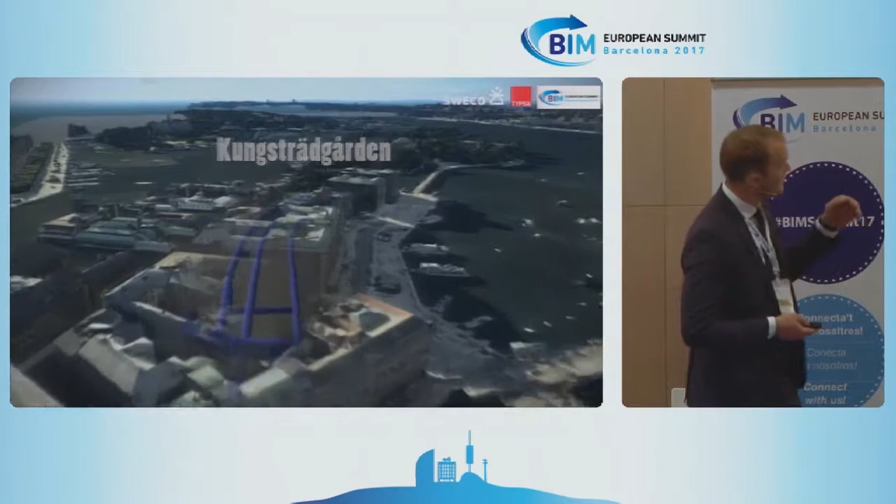Flying over the castle of Stockholm, we will turn around, go to the part we are working with. This is the existing blue line today that has an end station here. The entire tunnel runs through rock, and there's a deep crack under the Baltic Sea, where the construction will take place.

Moving forward, we'll see the Sofia station, which is more than 100 meters underground. It is one of the deepest stations in the world. Moving forward, we'll have a branch here. One goes to Söderort and one goes to the Nacka municipality.

Starting with the Nacka municipality, we will have, you can see the Hammarby Canal, which has entrances on both sides of the canal. Moving forward, we will see the Sickla station, which is really very important due to shopping malls and connection points for public transport. Moving forward, we'll see Järla and the end station here, Nacka, which is extremely important on the south side of Stockholm.

This is the other branch. You can see we were flying over Gullmarsplan, which is a new station under the existing one, Slakthuset, and the connection point to Sockenplan, to the existing one. Here we can see a top perspective, and you can see the size of this project.

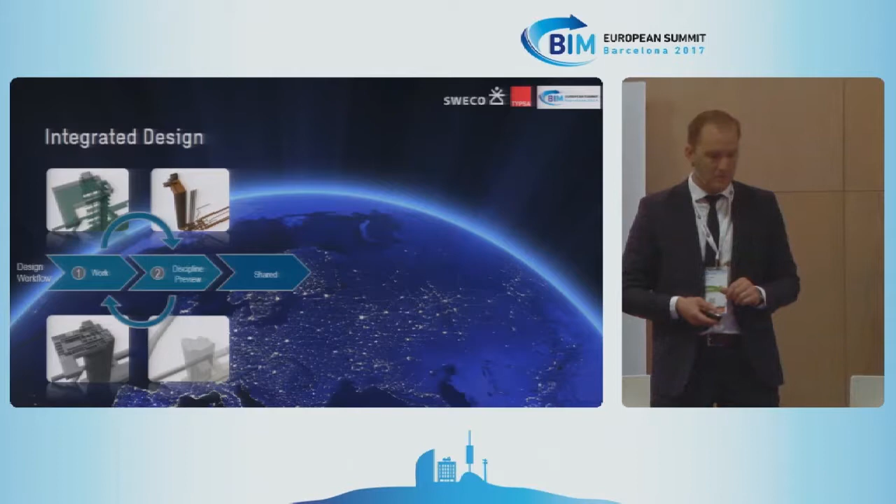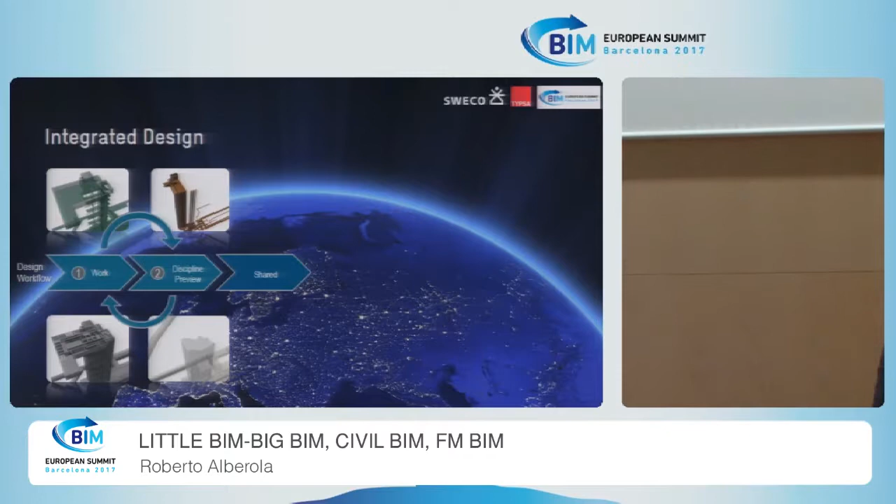Integrated design means every team working coordinated in the same way. The information exchange is managed inside a CDE, and design updates are available to all teams daily. The design advances by a continuous loop between work and preview states, and when reaching predefined milestones, it's pushed further within the workflow.

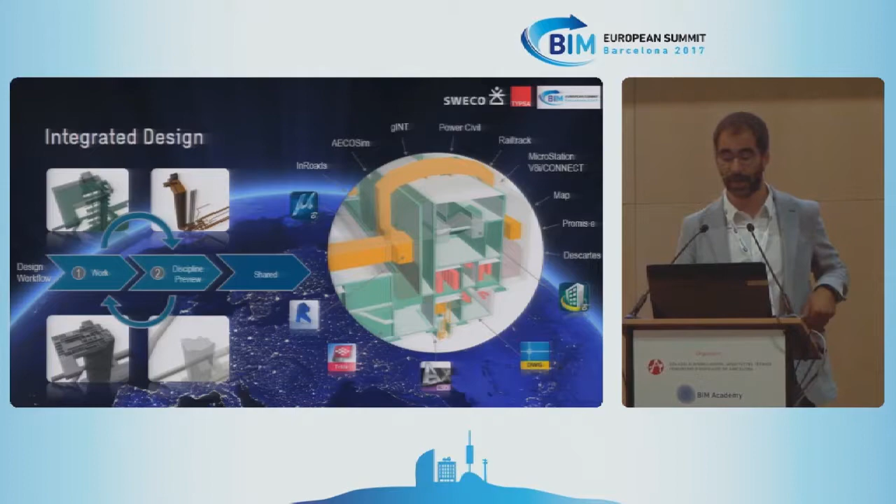We have involved many design tools, and the key point is how they work inside ProjectWise. Some are fully integrated as Bentley tools, but Revit and Civil 3D also have good integration in ProjectWise. We have achieved that. And for some, like Tekla, we have set up routines that upload the outcomes automatically.

The coordination process continues from the daily loop of work in progress states, and weekly the files pass through design and quality checks before going into shared state. Then every discipline model is gathered to be combined in a coordination model that serves as the basis for design review in meetings and coordination review.

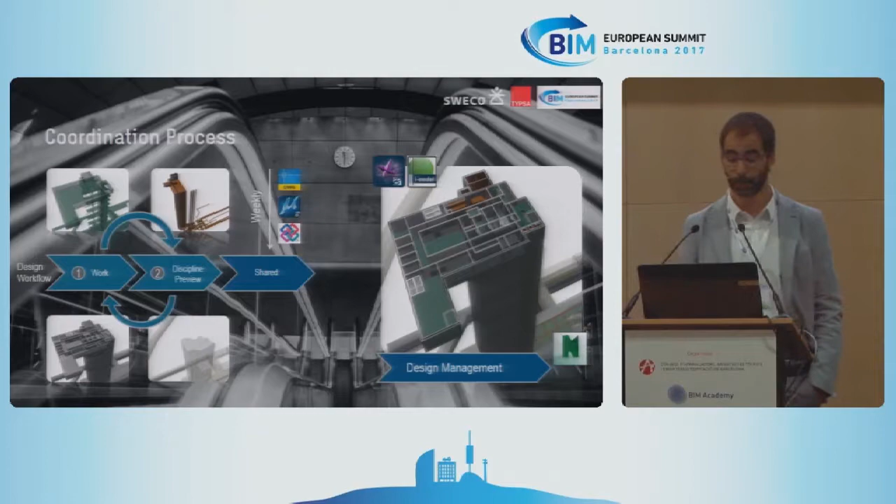We are sharing these models in meetings involving relevant teams from all our offices. The way the design is communicated to all teams is through the use of these coordination models. These federated models, which combine others, are updated on a weekly basis.

We are sharing them in several ways. Four of them you can see here, to be able to meet different needs inside ProjectWise or with a tool called Navigator in the web interface that ProjectWise provides. Mobile devices are also used daily to consult the updated design.

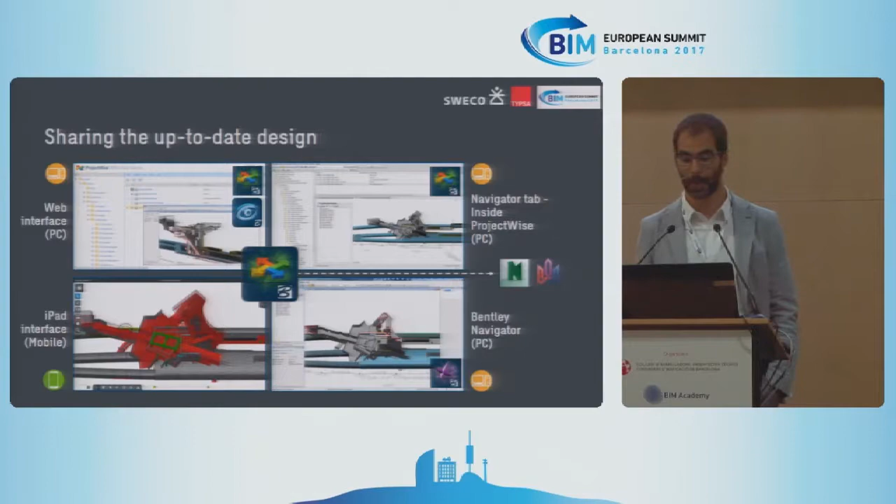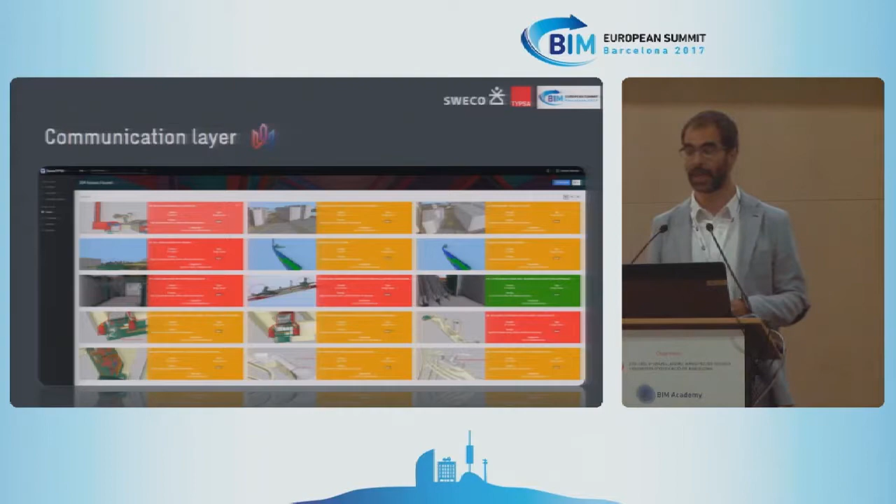BIM coordination takes place inside a cloud-based communication platform that manages the whole process. Clash checks are made by coordination teams to search for collisions between specific parts of the design. The conflict can then be classified and assigned to relevant teams, and all issues can be tracked so the design evolves free of major clashes.

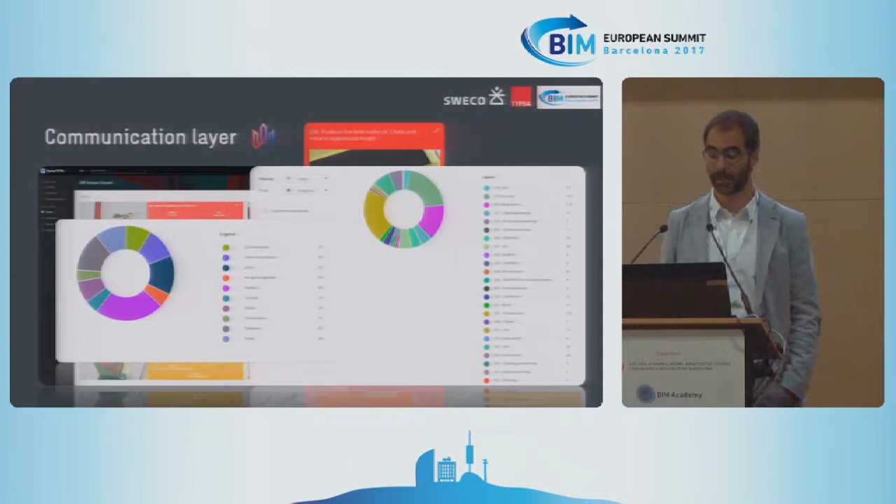Metrics allow us to measure the performance.

A little bit more about reality modeling, which was mentioned earlier. This is what we have already done and achieved, I think about 2 years ago. This is an example of how we have captured and created a reality model in a city environment, and this is one of the entrance areas of Sofia Station.

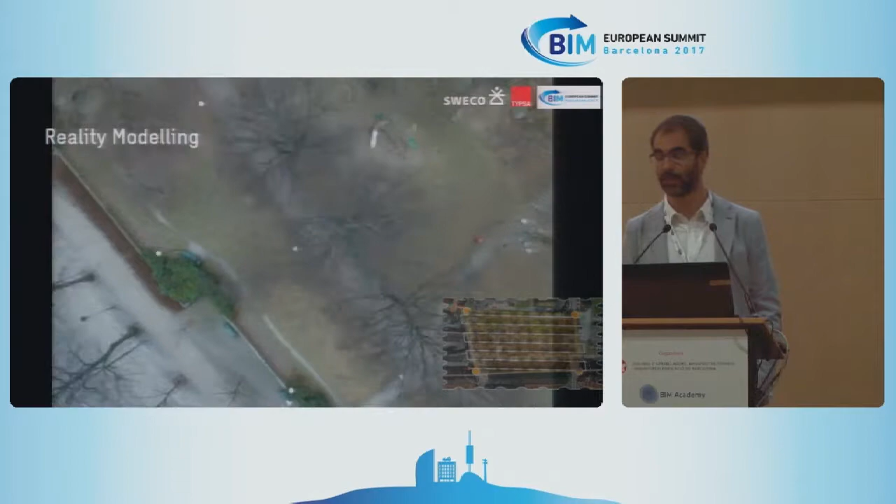The process is three steps: acquisition, by capturing data with drones, then processing the material, and then the model can be viewed and used in different modes: realistic mesh, point cloud, or wireframe.

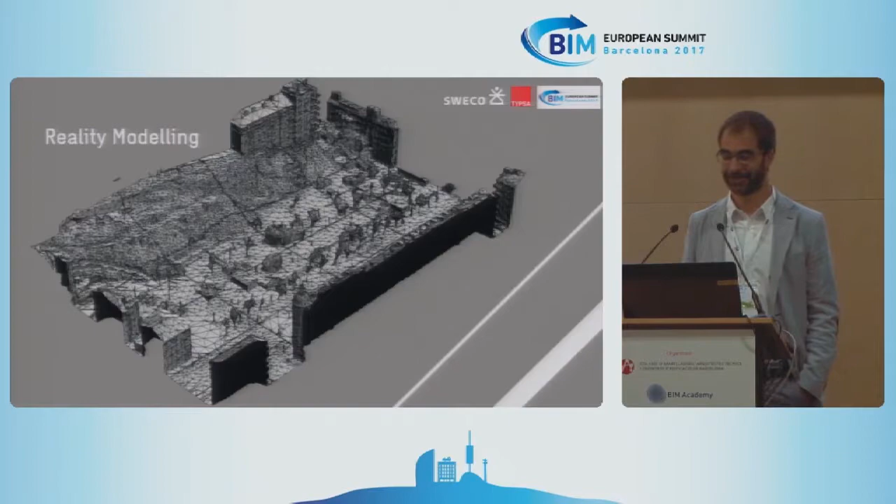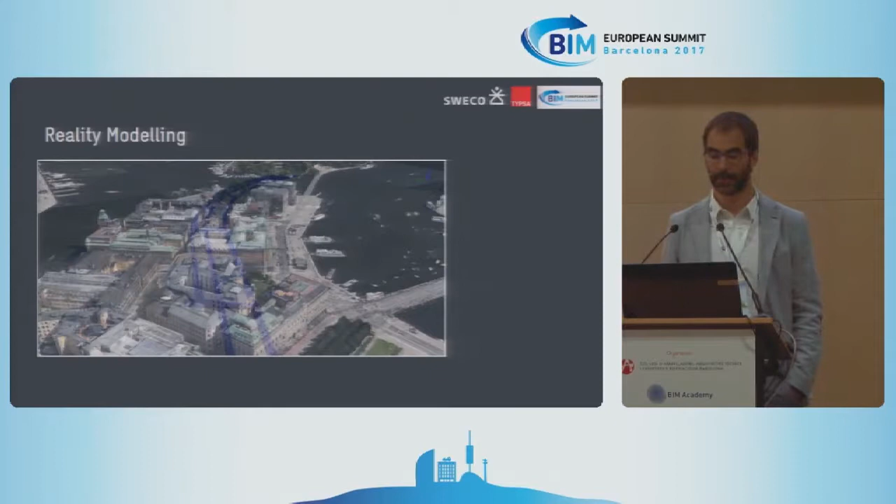We have used this data to visualize the existing conditions in the city of Stockholm and the Nacka municipality. It helps to understand where and how the allocation of the engineering design fits into the existing environment. It's very easy to use and has given us the opportunity to present a combined model that includes up-to-date design and real-world conditions together. This material has been used both internally and in communication with the client.

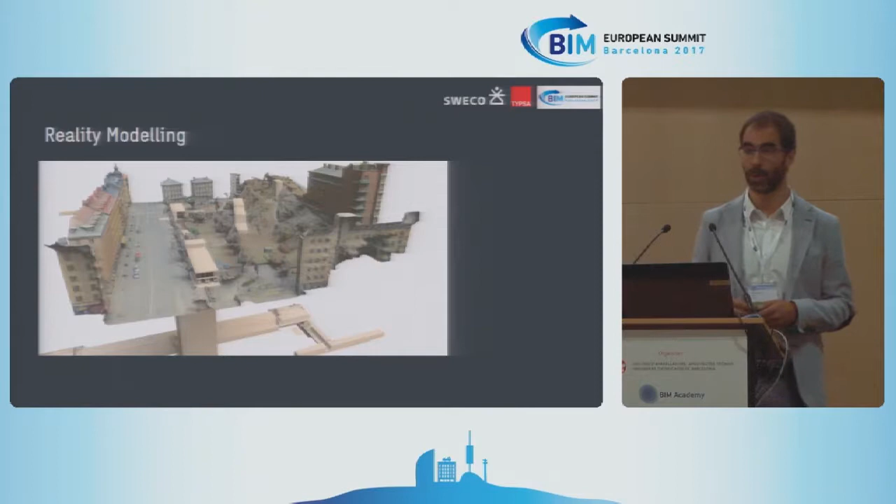One of the goals in the project is to use object-based design to support 4D and 5D. The data-rich models contain information in the objects at the required level. This information helps us integrate the design with production planning and cost estimation.

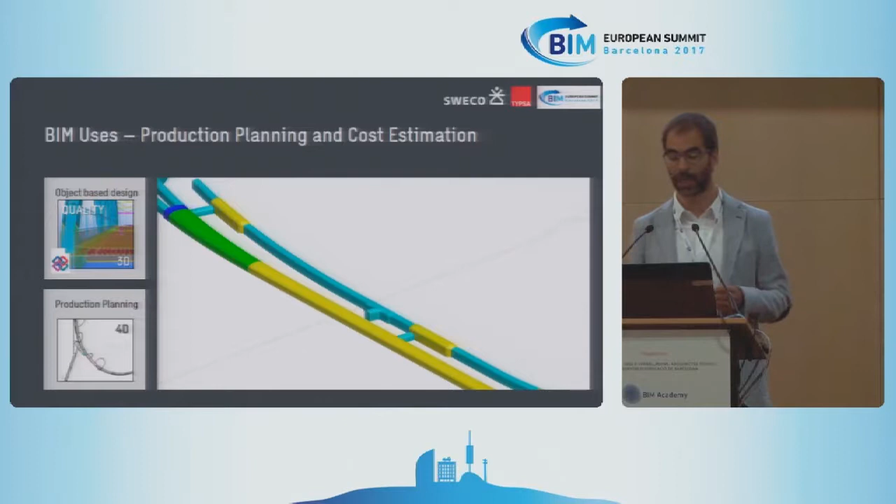We can drive the divisions on the production time plan by the outcomes from parametric rock tunnel design. We can locate quantities and estimate cost more easily, and we can also upload the IFCs directly into the estimation program.

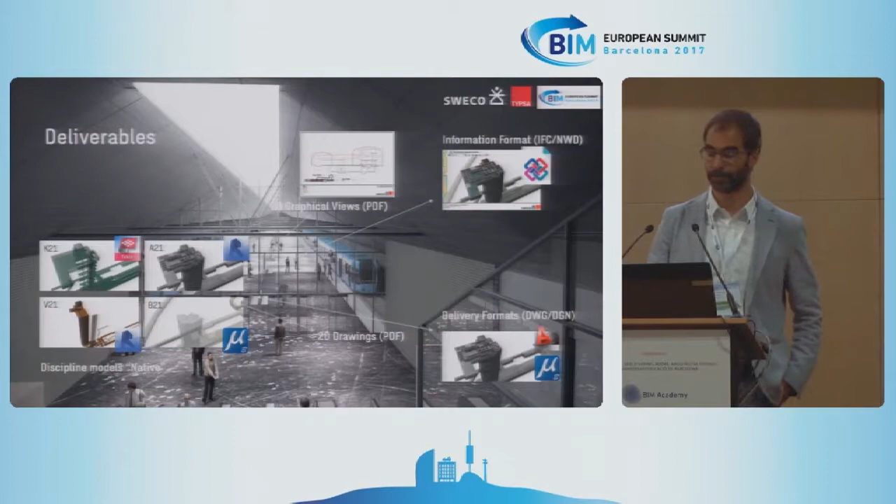The client requirements regarding deliverables include a wide variety of documents: 3D models in native and delivery formats, 2D drawings and graphical views, and bill of quantities and information deliveries. The strategy is to extract from native design models.

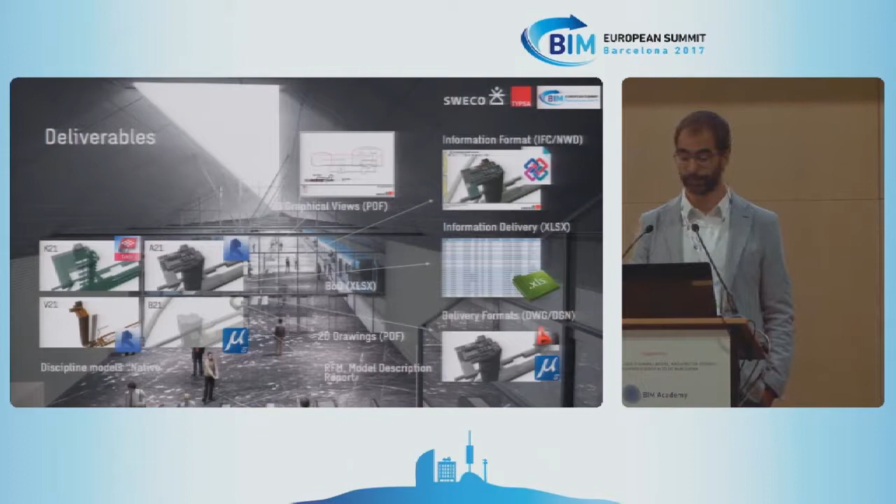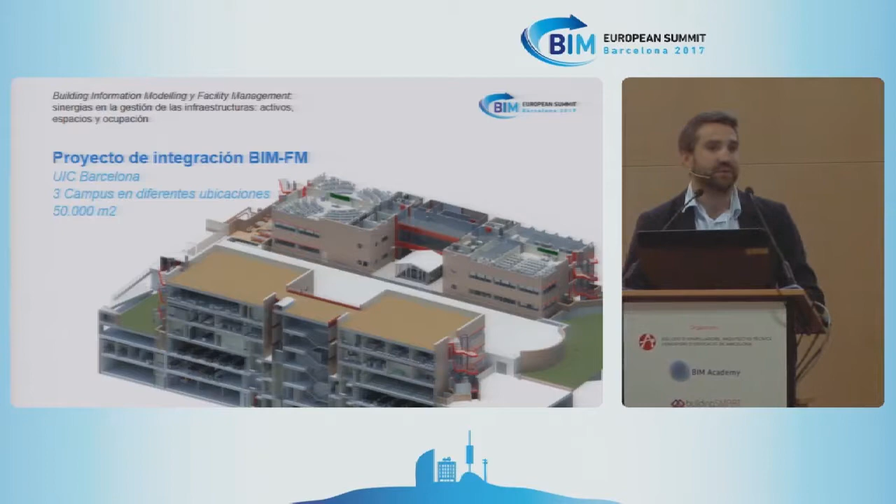From 2015, the university had implemented communication and information technologies. So we decided that something had to be done, and we started to implement BIM in order to automatize maintenance from all the services and facility management, transfers, general services, occupation. And that's how we started.

My colleagues, Daniel and Roberto, talk about the connection between technical equipments. But once you are in the organization, the collaboration must be created among different departments, because I require not only information related to infrastructure, but also in terms of occupation, the staff, the departments who employ the staff, again occupation and the use of buildings, etc.

And ultimately, what I wanted to say, and something I don't want to forget, since I don't have much time, is that the collaborative process helps to create a unique database. A unique database which is true.

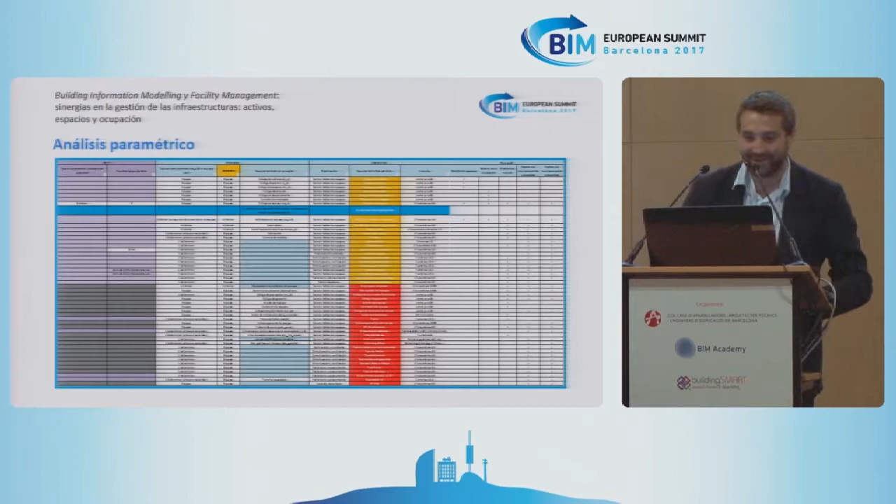And you have to define what's needed and not needed. Everything you don't need, either you take it out, or you mark it in gray, or you comment that it's not necessary. But you have to define what you actually need or not, because it will make your life easier.

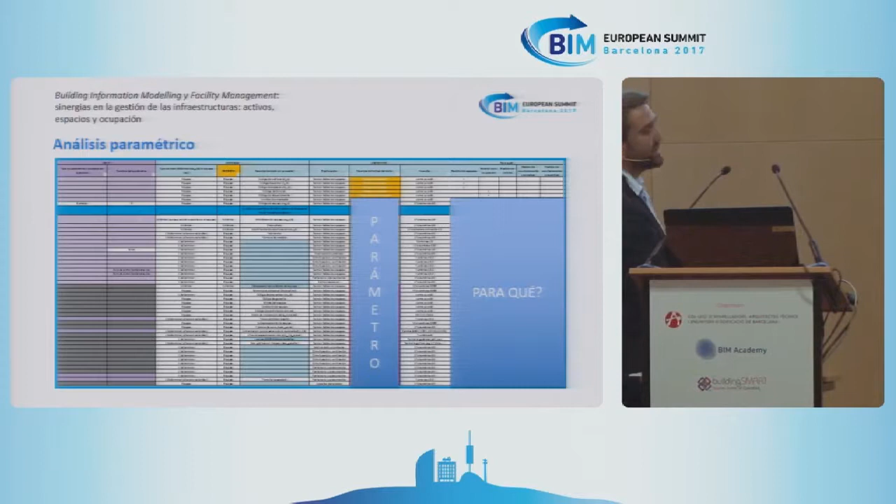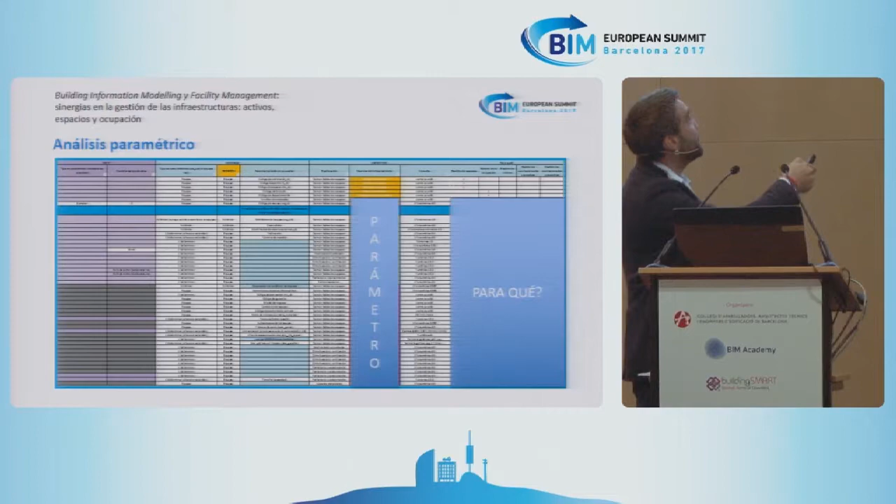Well, now I'm going to explain this a little bit. That will be the parameters I needed. I reduced them to 30. I think you cannot see it very well, but occupation management, assets management, and so on, so the different uses of my departments.

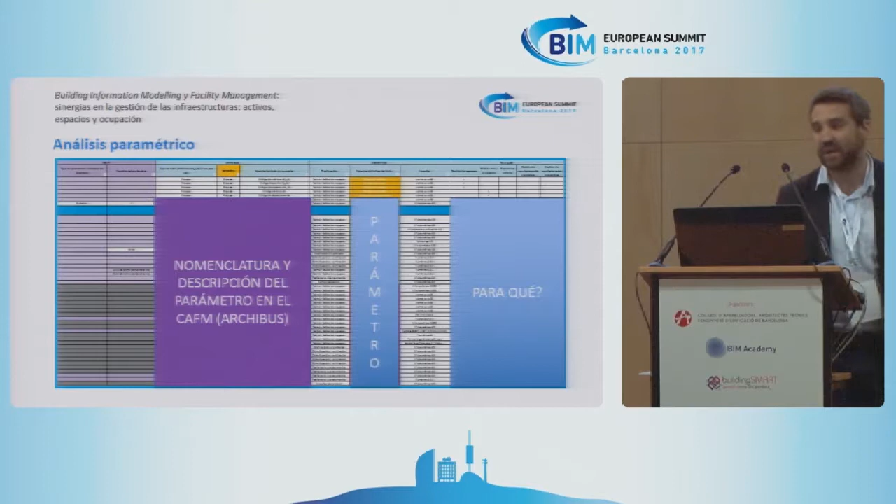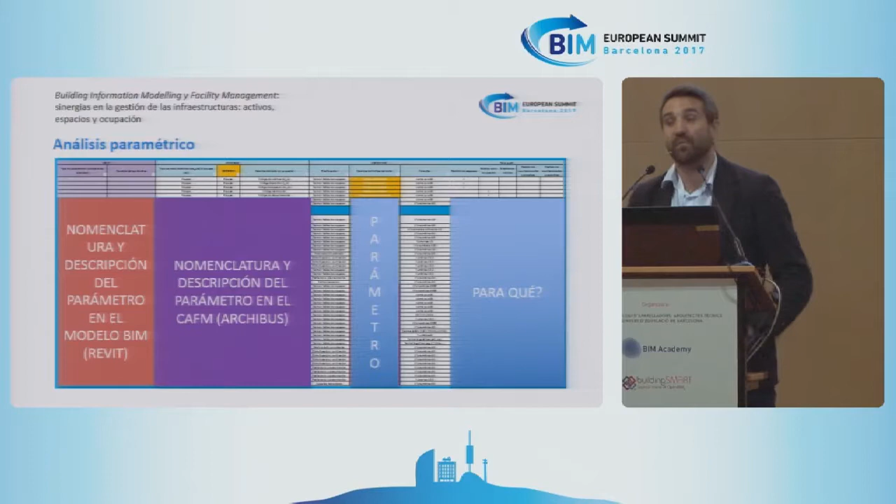That would be the naming and the description of the parameter. In this case, it was Archibus. And then the naming and the description of the parameter in BIM, so that will be the interrelationship in Revit. And what for? In order to manage maintenance, items replacements, and different uses.

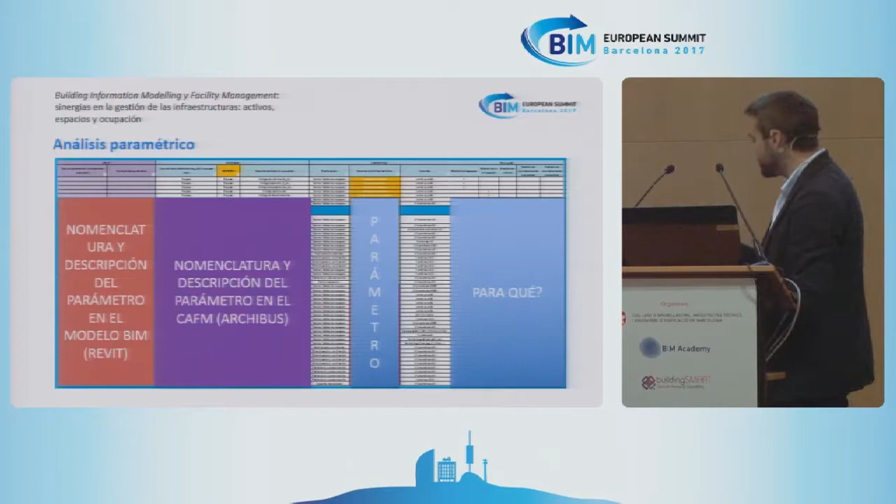Then the CAFM parameter, I think that will be the one in Archibus. So this information, the one on the left, is the same as the one on the right. The next step would be, from which assets do I require which parameters? Sure, I won't need all the information regarding all assets.

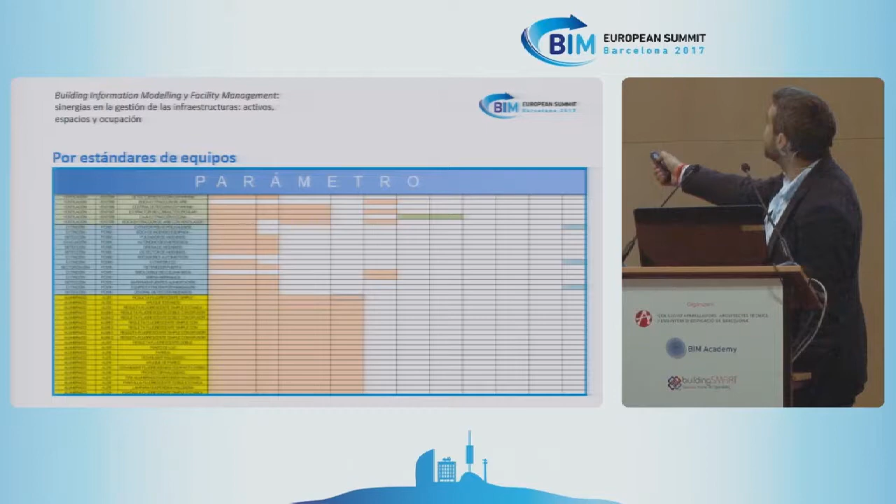So in this case, basically, to classify, what do I need? As we can see here, like fire extinguishers, refrigerators, and so on. So classify the assets and define the parameters that we require. That belongs to the previous work.

In our project, we had in the first place a strategic meeting to elaborate the execution plan, to define what we wanted, and then to gather the information, data gathering. Mostly we gathered all this information on site. Actually, there were a group of students who had taken a 30-hour course on Revit, so they helped us, and they started working with this.

The third place, the modeling. That was the largest stage, the longest actually, a whole summer.

Then dump and integration of the data on the CAFM. So we had to integrate all this information in the facilities management system. And it may seem pretty obvious, but if you have skipped some previous steps, then this dumping and integration will be quite complex and difficult.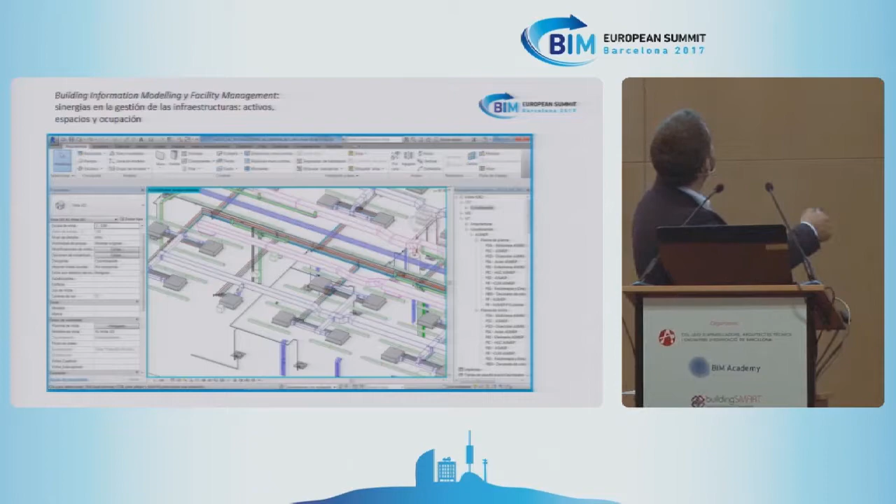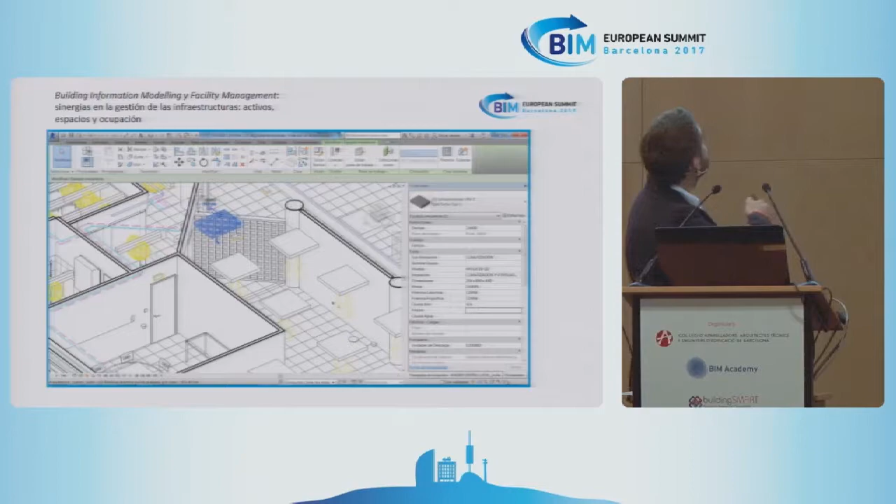Some images I want to provide you with, but what matters is not the image, it's the data that you can see here on the right, the type and so on. That's quite nice to see where the pipelines go through, the wires and so on. So to have the data and that this data corresponds to reality.

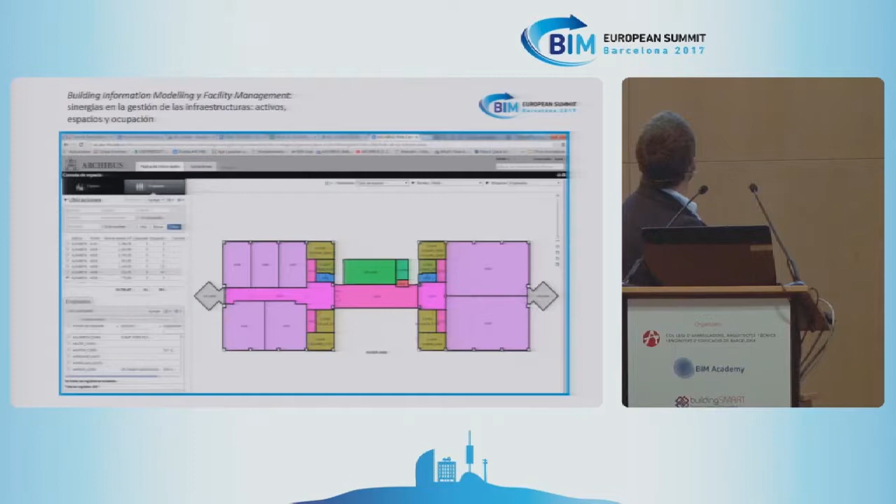So that's where I work. That's my operation platform. I see all reports and all issues, and I can follow the current state of the operation, then the map of the different spaces or the different rooms in the building. So I have also here the information of all the staff working in every room, and I can see if a room is used or not, and at what times.

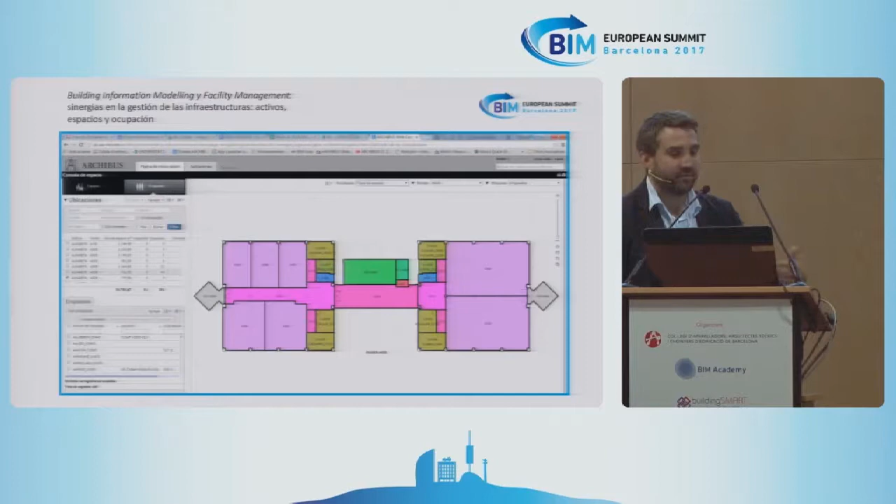And so that would be it. Thank you very much for your attention. I hope it was helpful.

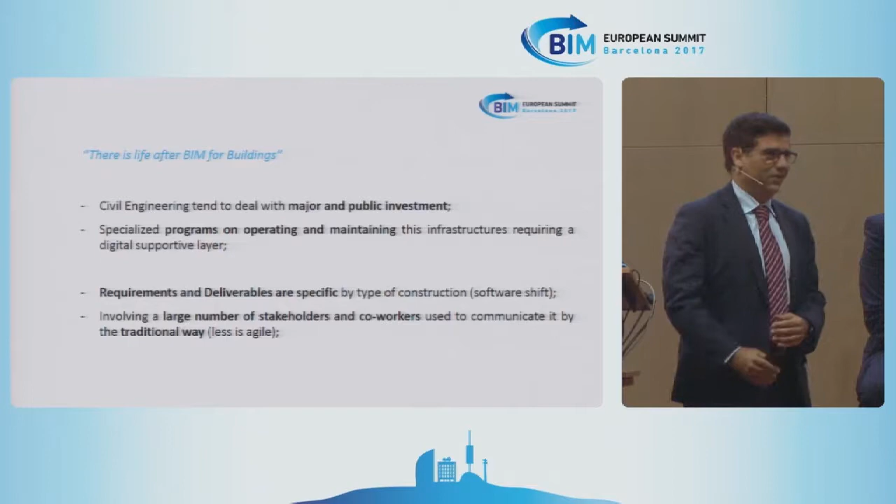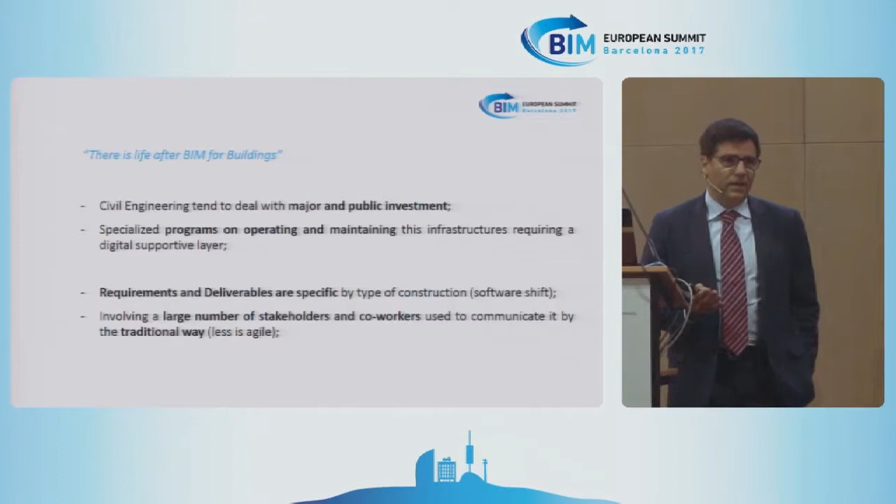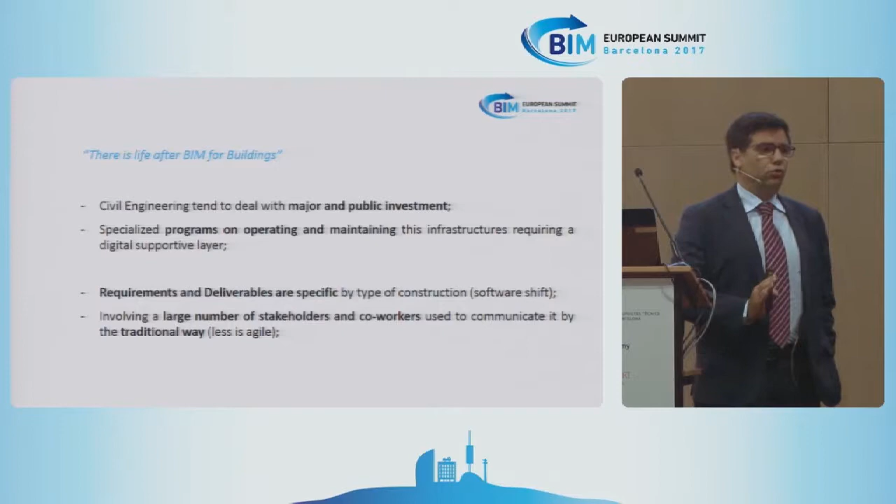Several guys haven't talked about infra BIM, civil BIM, road BIM. Civil engineering is quite an important approach to BIM because we deal mainly with major public and large investments. Secondly, we have specialized programs used to apply on those kinds of construction types. It's very important that we anticipate the need of those structures to operate and maintain in the future. On the counterpart, the requirements and deliverables are specific, so we need a software approach to deal with it, and we have a large number of people, large number of profiles doing it the traditional way, and we need to change it. So we have here some challenges.

I will go fast through 4 small practical cases that will talk by themselves. That's what I think is important.

This first one is an industrial facility project in Bolivia. You can think it could be a building, but this is totally an industrial building. You don't need an architect, or you don't have one. Sometimes you have architects to manage the space, manage something, but here we dealt with an international team, working internationally, from Spain, Portugal, Mexico, Ecuador, Peru, and Bolivia. Nowadays this is the usual kind of work we have: each one at home, dealing with a collaborative platform and working all together, simultaneous modeling of all of this, and also taking account of the logistics and assembly part. The logistics and assembly part are very important in industrial projects because you don't have space on site sometimes. You need to prepare everything in advance.

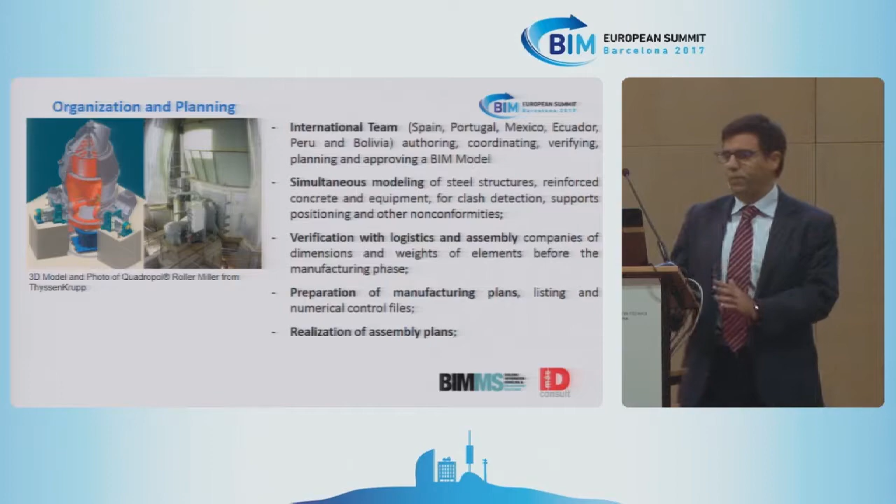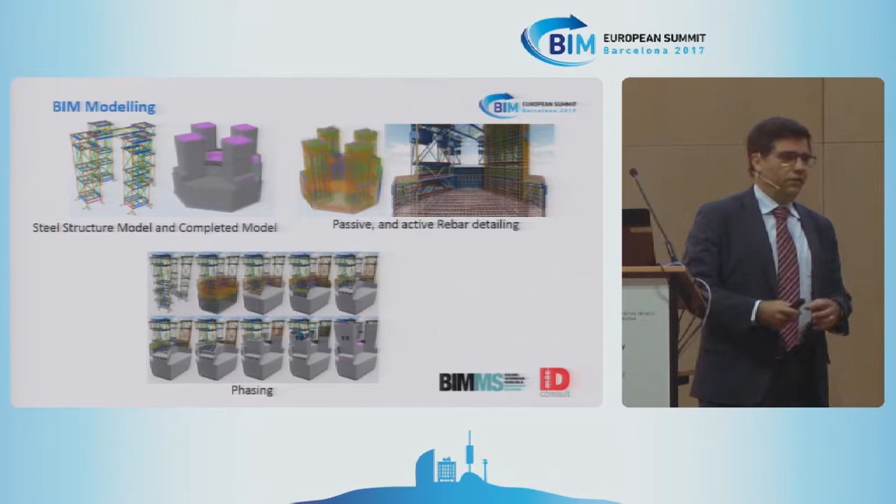This was a factory to make cement, in Bolivia, and we had the need to model the rebar, the steel, but all of them together. This was a need asked by the owner, who had experience on this and mandated it. It proved to be right because the clash between all of these kinds of structural engineering structures found things that could be problems on site.

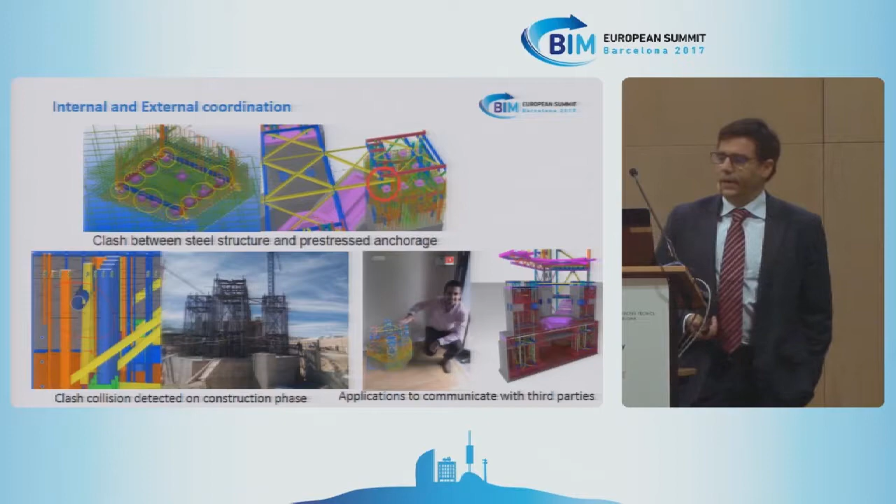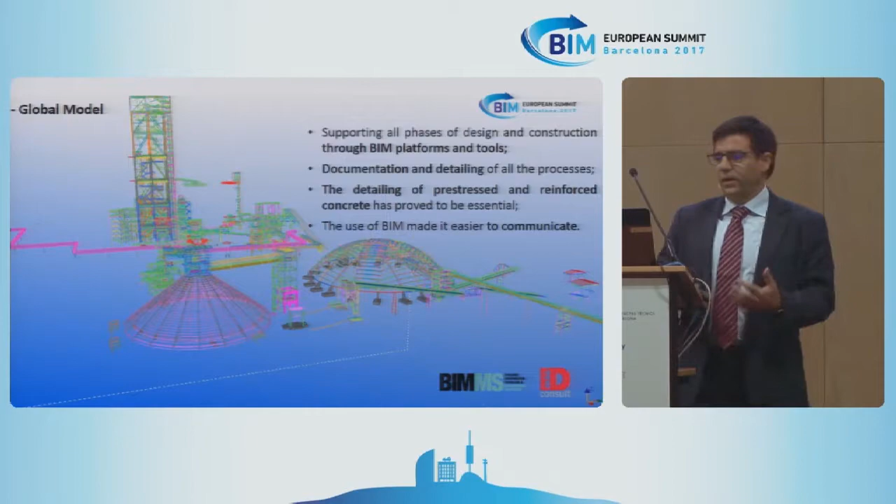We also developed something to present to people that are not so skilled in BIM, in the right down corner, to present it in a reality-based way. This kind of global site construction has these types of connections of several organs linked together, so you need to take account of the linking of them, where are they located.

The second case is a wastewater treatment plant in Portugal, a normal medium-sized plant. When you deal with this, namely in a design-build contract type with a contractor, you have a tendering phase with less than 1 month to make a proposition. So you need to make a very fast conceptual analysis, produce visualization to help your proposal in marketing, and take a quantity takeoff that needs to be very accurate, but when you do it fast, you can have problems with accuracy. So the first thing when you get the project, in the execution phase, is to verify the quantity takeoff, adjust the planning, and optimize the solutions.

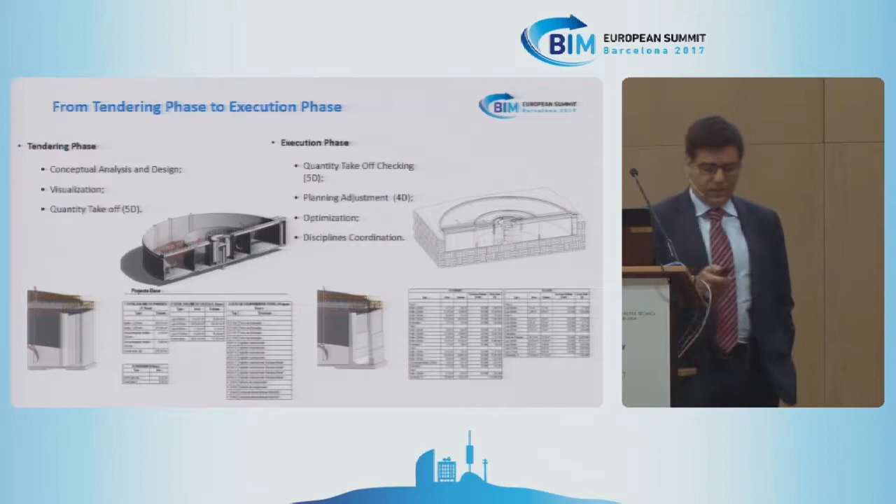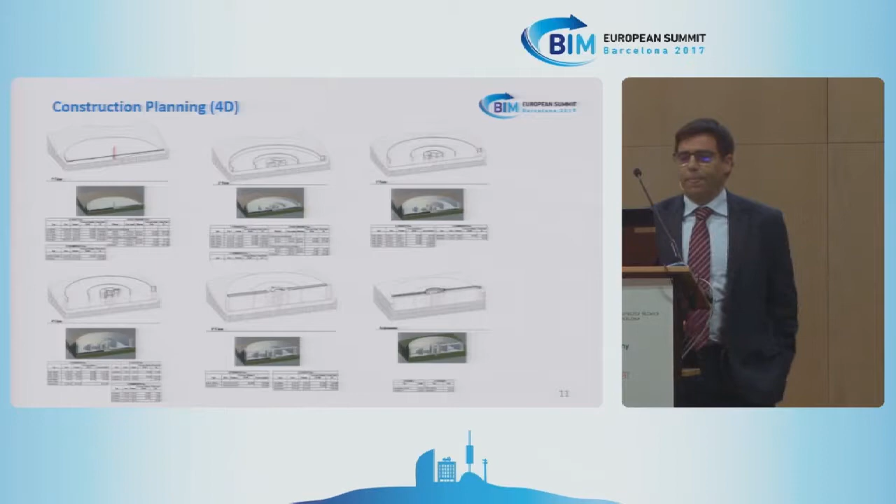As you can see here, you have a straight section, and here the section optimized because of the concreting and so on. Also dealing with the phasing, all the phases sometimes linked to the project. I put this here on purpose: this is visualization. In water treatment, the quality of this visualization is very important. This is not BIM Hollywood, this is taking care of what BIM has to give to us.

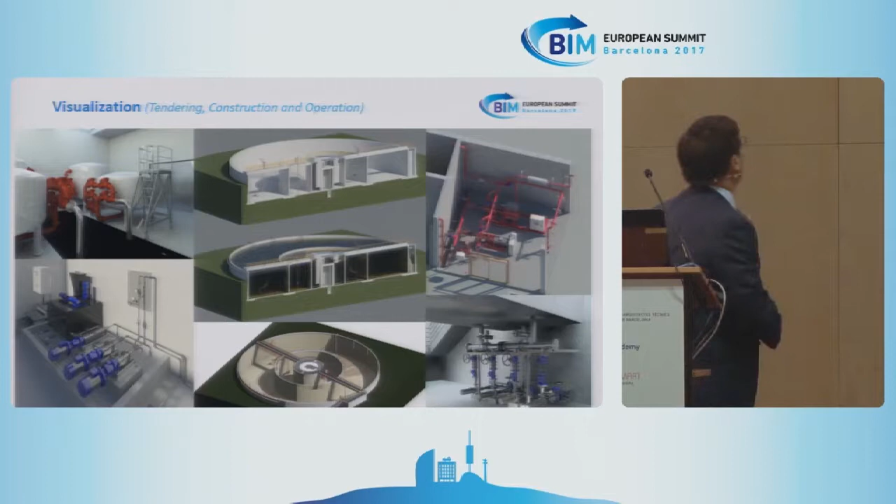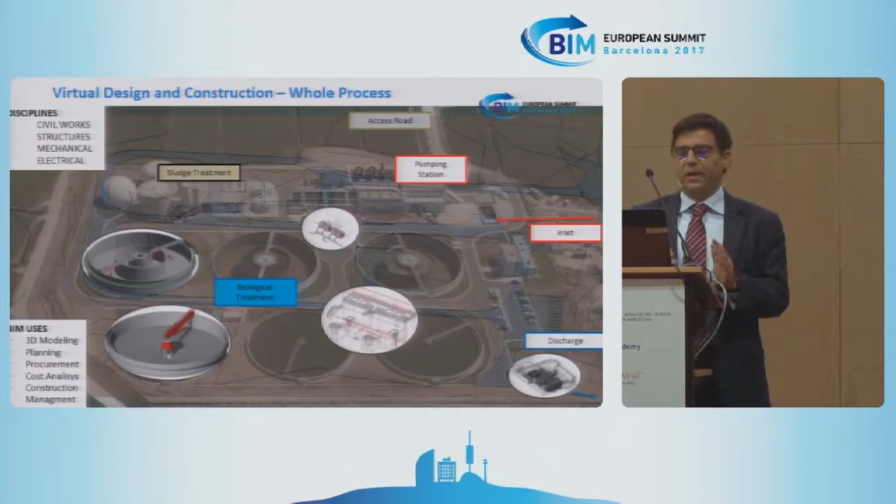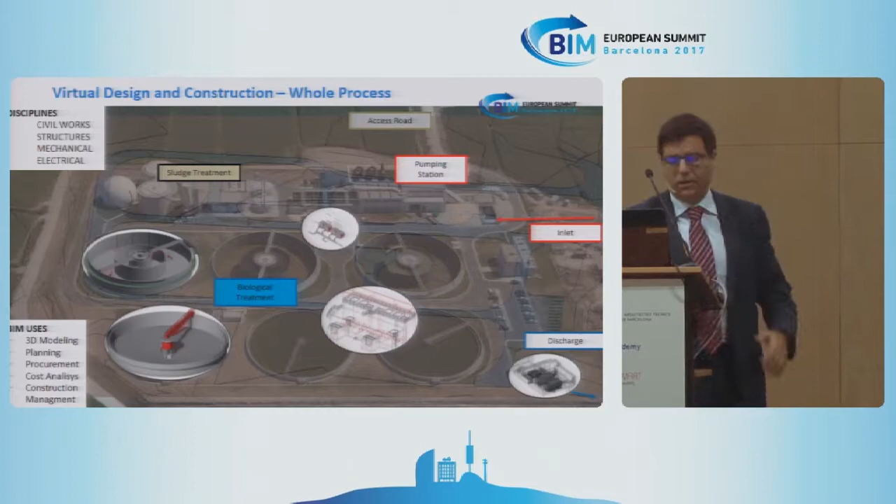In this case, we used it on the tendering phase as marketing, but also during construction and within the operation. People want to see the type of equipment it will have to handle. Here you can find a global model, all connected, really a virtual design and construction of the whole process, not just one organ or one piece of BIM, a model.

Bridge information modeling. Civil engineers deal with bridges, I can name it here, of course. I could name tunnels and other types of structures, but this kind of bridge you need to deal with on almost every road and train as well.

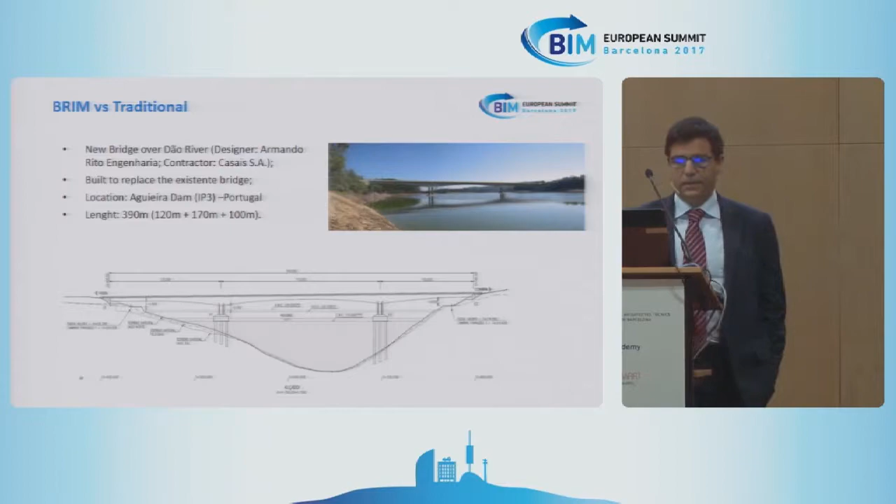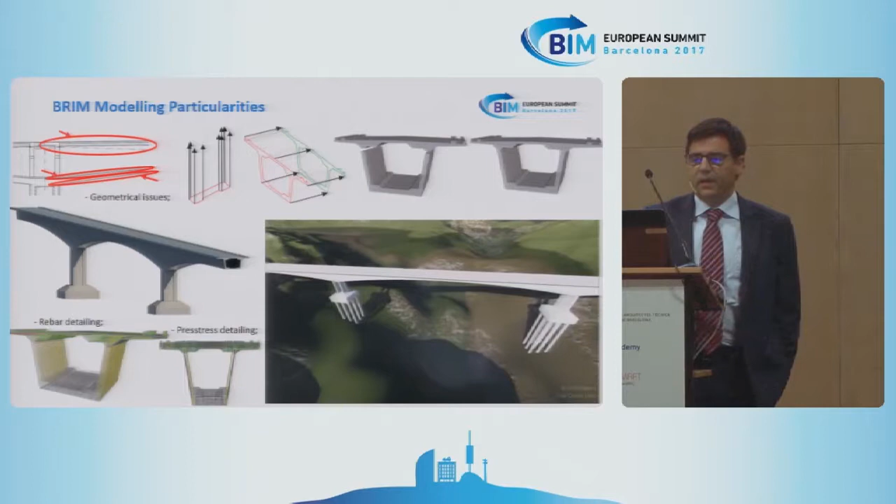This bridge was already designed, and it was made a pilot case trying to see how it could be done with BIM against traditional methods. So we have this type of drawings, and they've made lots of special modelings.

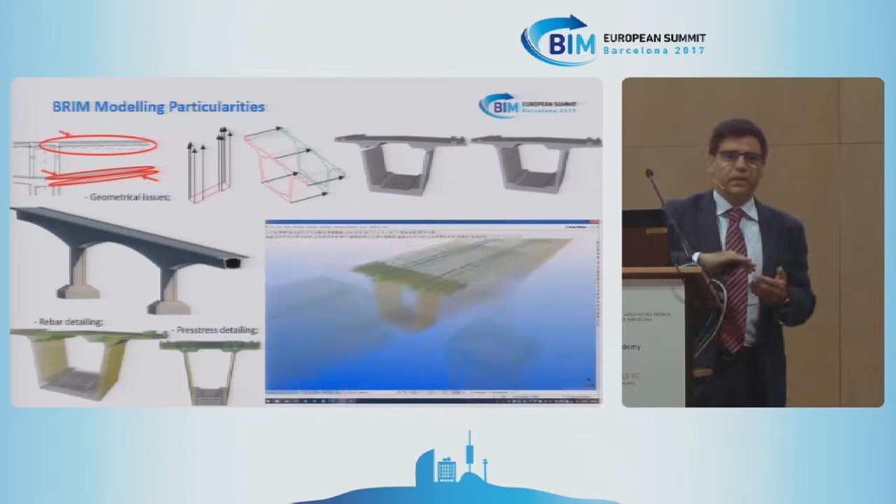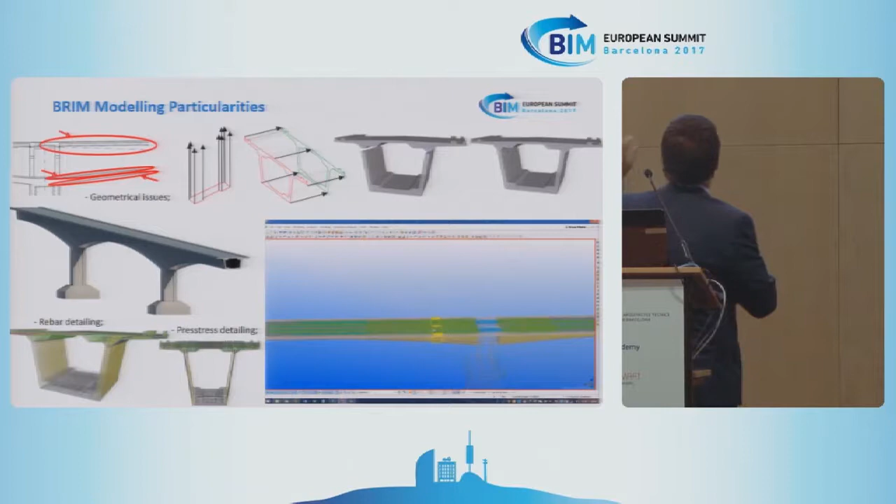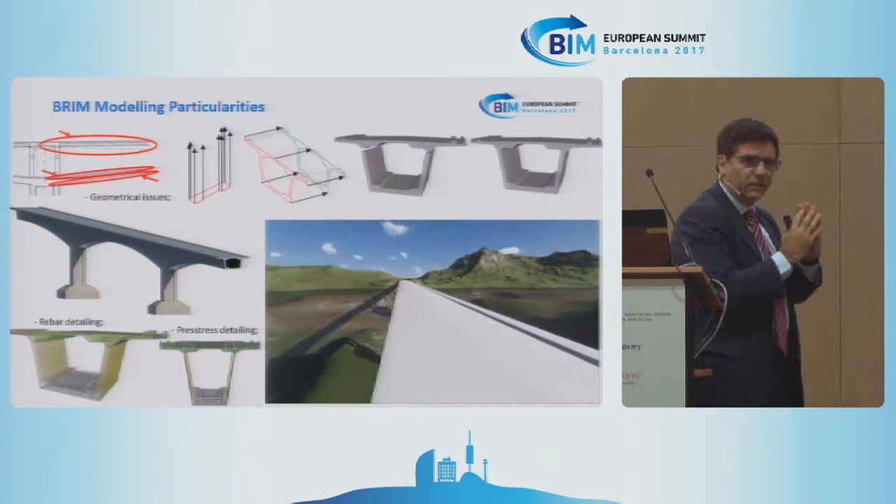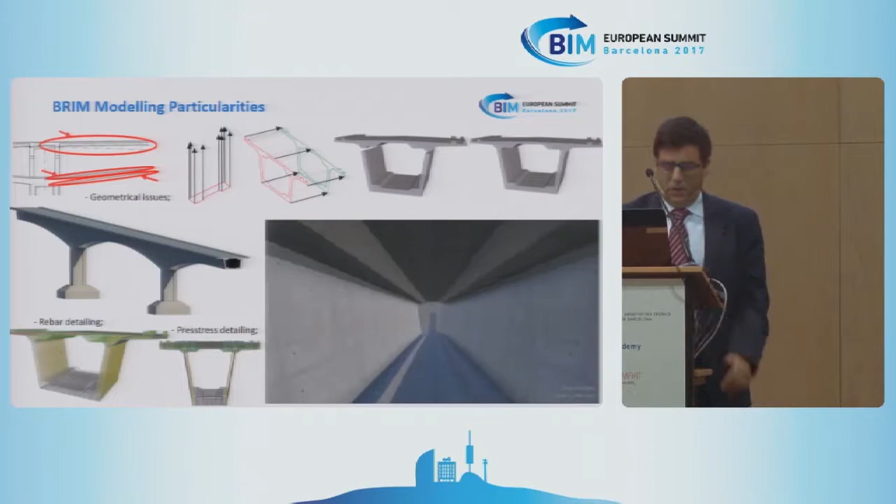Bridge information modeling has a major problem that's the same in dams: special geometry issues, shapes that need to be shaped. For instance, these 3 slabs each have different and variable height, and you can cut the bridge on a vertical slash or a perpendicular slash to the alignment. Bridges tend to be variable, sometimes curved, and all of this, with the need for rebar detailing and pre-stress detailing, comes with a huge challenge to make bridges.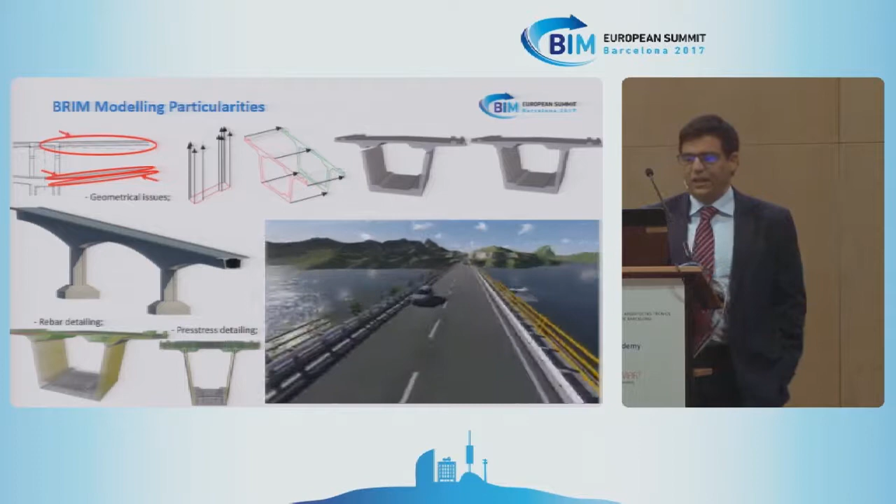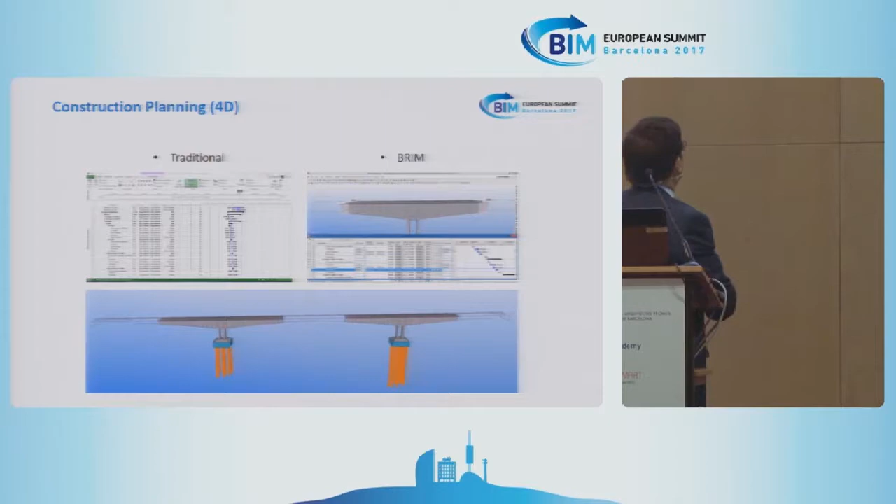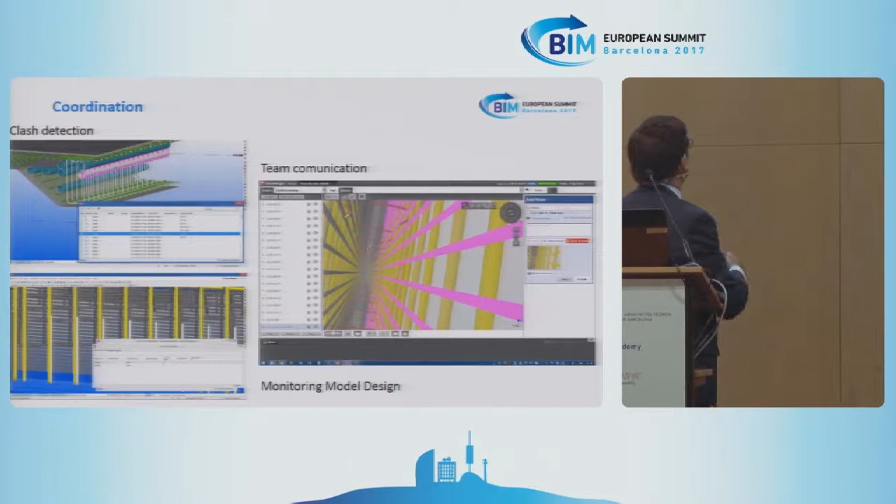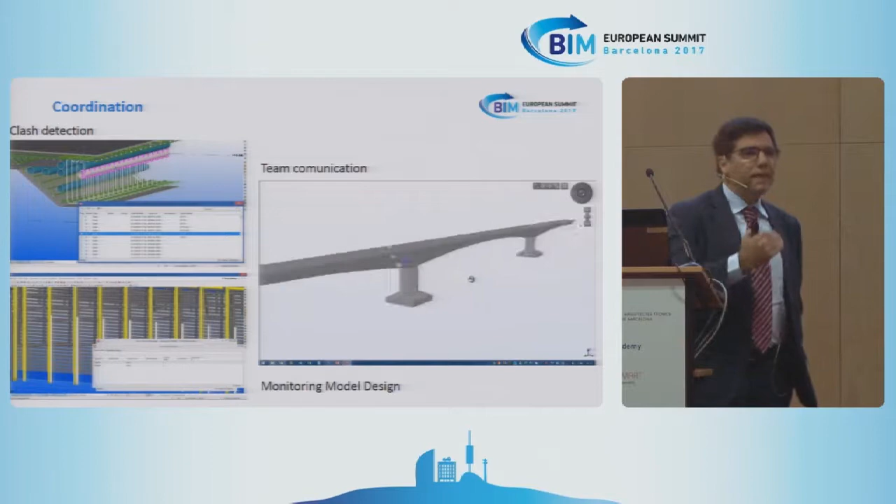And also, of course, the planning - the planning is all in the bridge. The way any kind of bridge is built needs to have the model interconnected, and also the team communication ready to prepare a model for monitoring. This is very important - bridges are starting to have BIM models with all the sensors and monitors that the bridge has to deal with.

The last one is a highway in Algeria, but I will split it into 2 phases. The first is the preliminary phase. There's a session about infrastructure, so I won't take much time on that - there will be experts talking about this. But we have a problem in BIM, mainly in highways, with this preliminary phase.

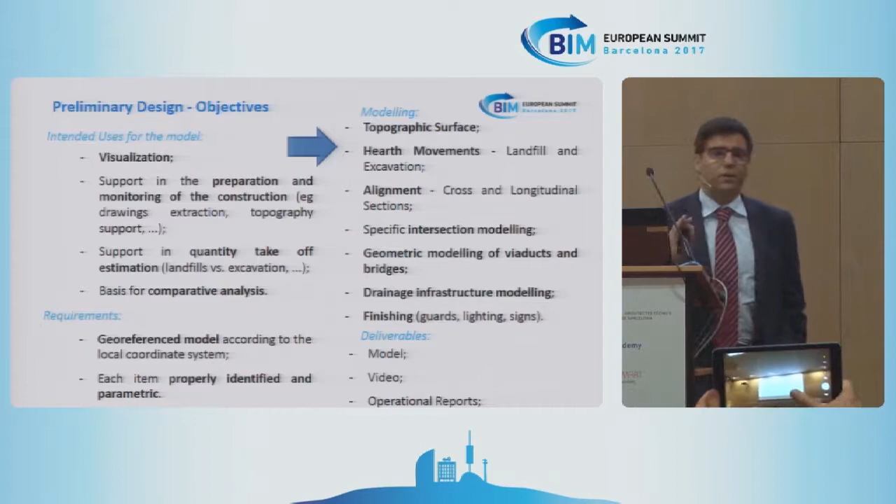In this preliminary phase, you don't have everything drawn, so you need to take choices. In this case, with Teixeira Duarte, the choice was: what are the intended uses you want in the model? What are the requirements? So we decided what to model and what to deliver. The deliverables in this phase, for a contractor in a bid-build approach, were only a model, a video, and an operational report.

What happens? Of course, interconnection and coordination between the teams. I can take 2 minutes more.

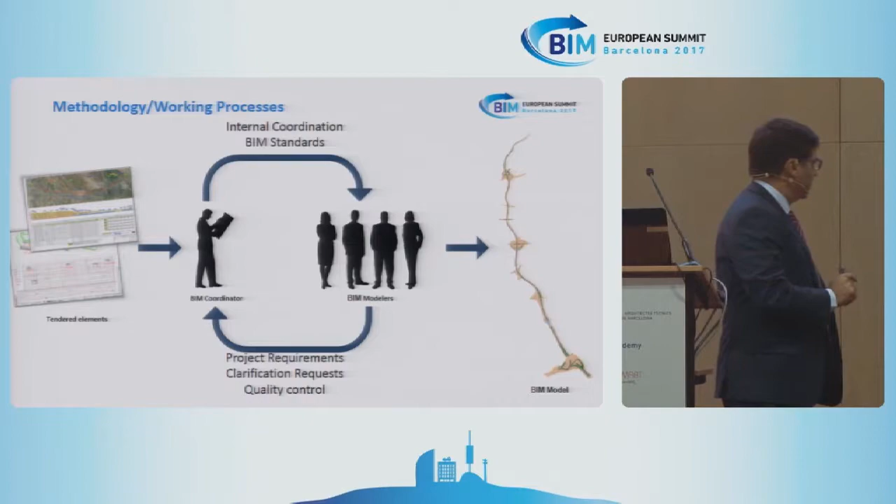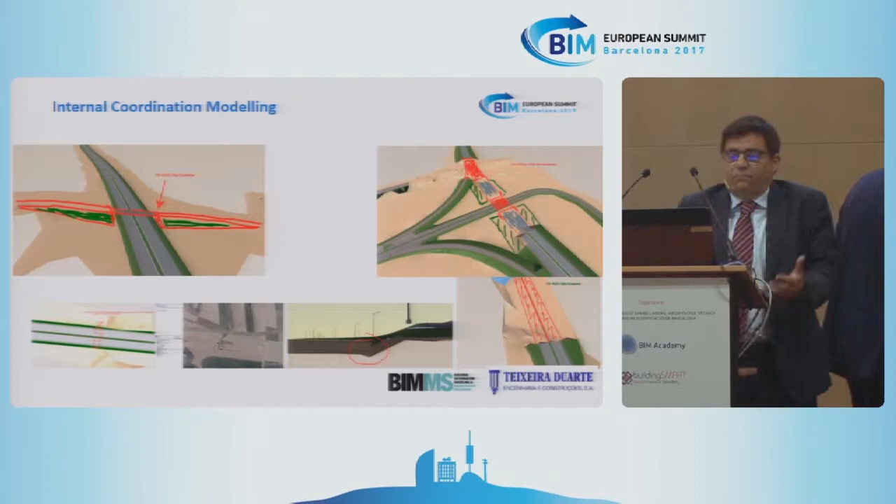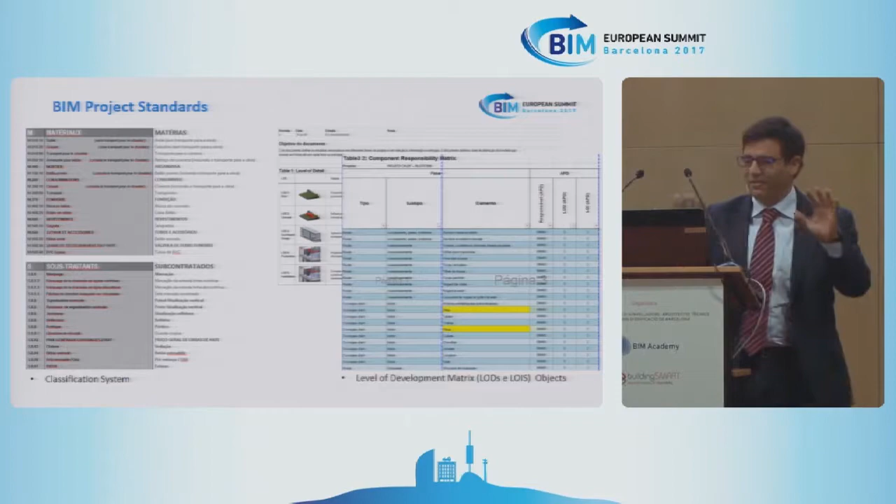Interconnection between the teams - understanding the tender elements, but lots of times bridging the gap between the execution project and what we have. You need to use our standards, a very strict level of development or level of detail, level of information, whatever you want and wherever, in whichever country you are, and also parametric modeling, for instance, for viaducts.

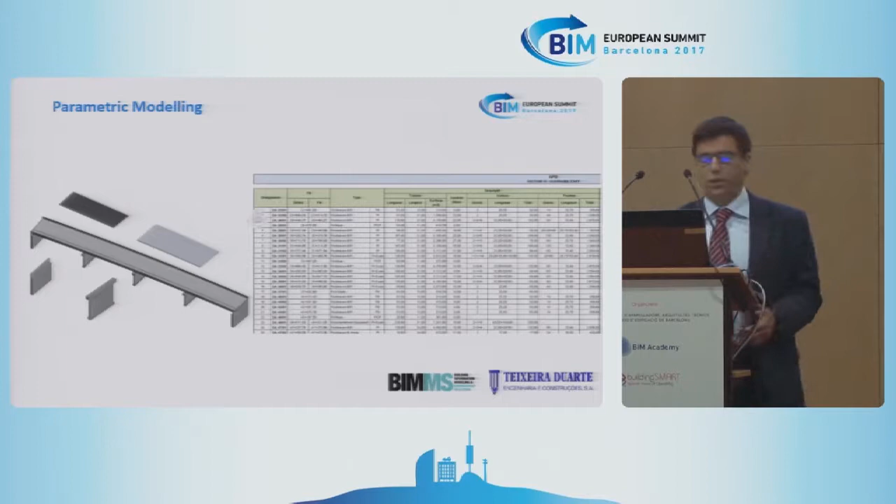In this kind of roads, you can earn money and time by making parametric modeling and having phasing on viaducts. Of course, the clarification requests should be integrated into the model, as well as the quality assurance of the model - the model should be assessed for its quality.

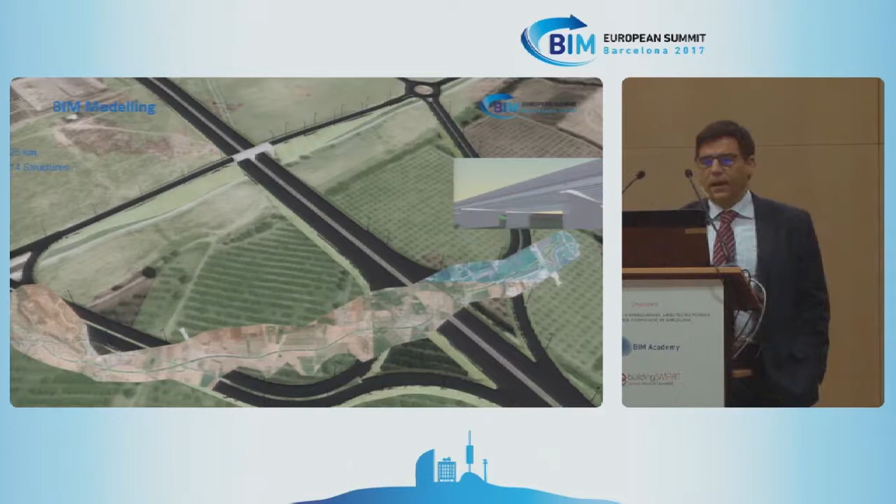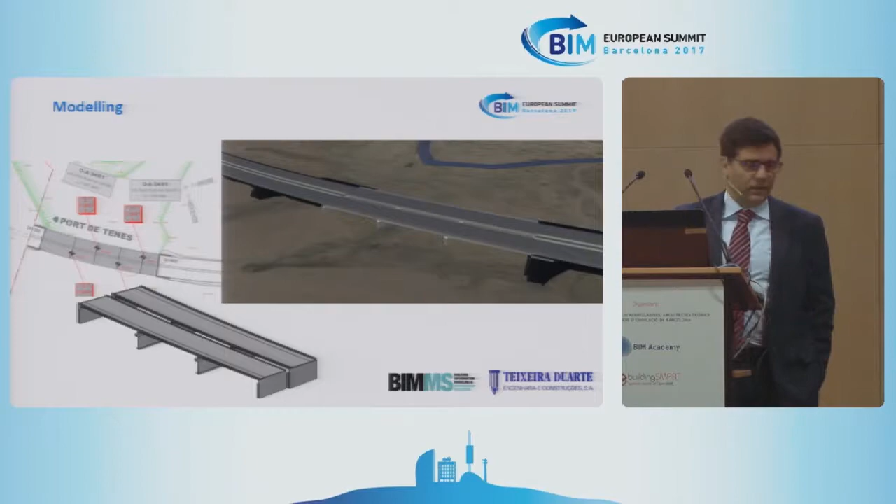This highway was 25 kilometers with 14 structures, and you have here several types of... I am out of time, so I will finish by just showing you this small movie - just 1 minute more, and I'm finishing.

As you can see, it's in a preliminary phase, but you can mount a lot in this phase with this type. On the last phase, I will take this example.

This example on Brazil, with our partners Eficácia, and engineer Gustavo Simões, is a highway that was mainly a cultural problem. They needed - it was on the coast with land expropriation issues - to deal with the population, with local authorities, and with only 1 month to do it.

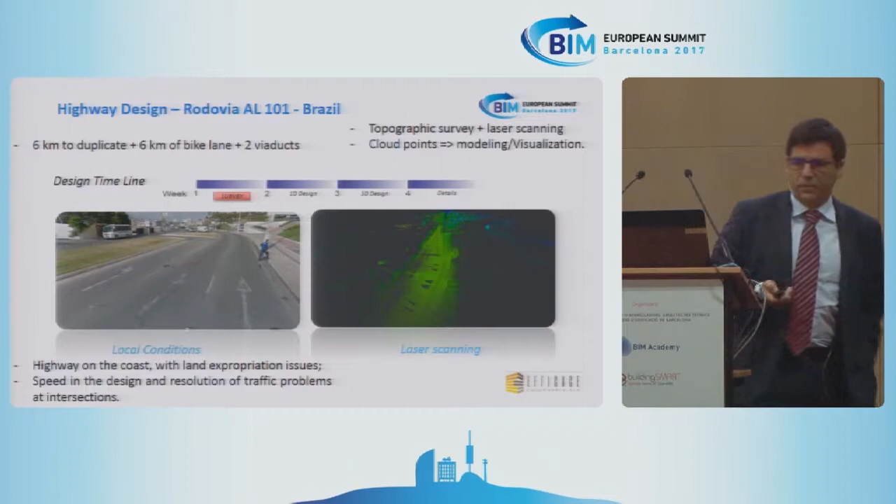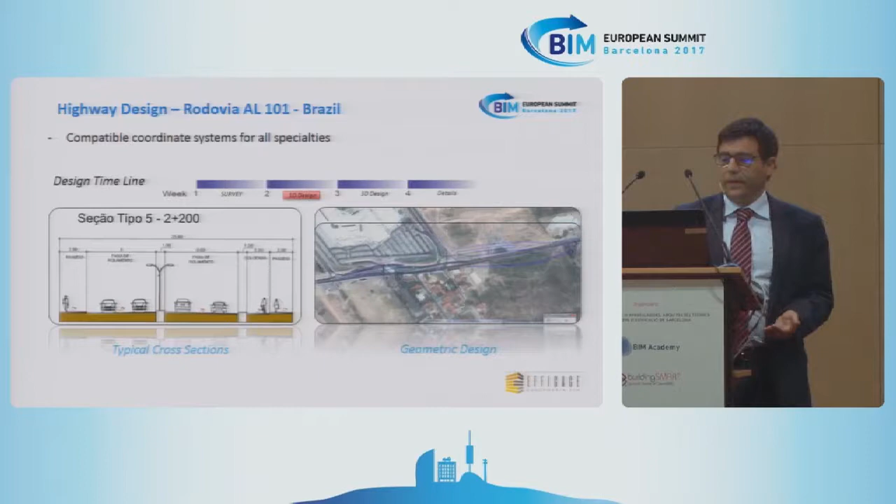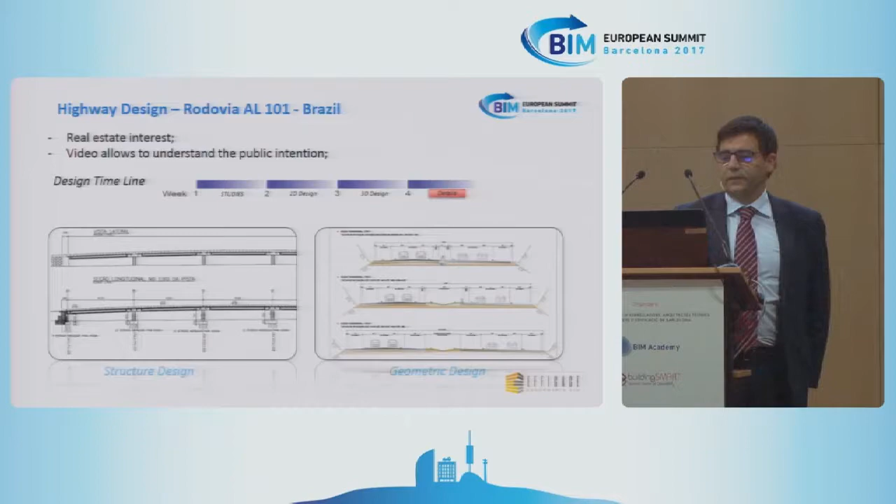So they had to capture the reality, as we have already seen, and speed up all these types of issues. Of course, the 2D design was a starting point, trying to reach some alignments. Then they come to the 3D designs - the unleveled viaducts, the different levels of connection - ending with a video that allowed the population to understand exactly what it intends to be done, appreciating the project by all.

What you are seeing is a cloud point-based acquisition - it's not a photo, it's a cloud point acquired next to our model, which of course has these dynamic elements.